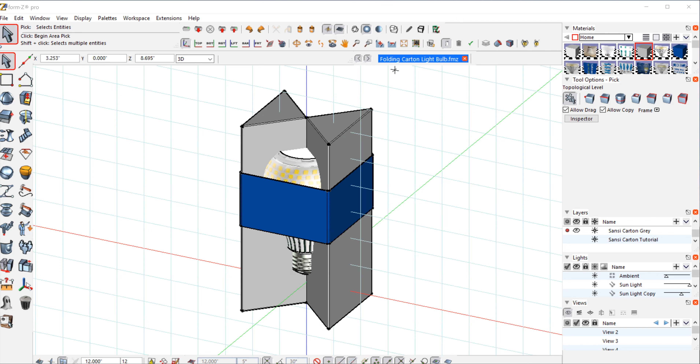So now we have the light bulb built. I'm going to show how to create this folding carton to contain the product. It's based on these two triangular shapes. It's pretty straightforward, and it protects the bulb.

There's no additional plastic or vacuum forming. The bulb is inside and it's protected. I have this outer cardboard sleeve which contains everything, so you can touch the bulb and see it almost in its entirety, front and back. It provides protection and has a relatively high-end look to it.

This particular design, I'm going to show the graphics so it can be positioned on shelf vertically and horizontally, which is quite often done in the light bulb area. They have different orientations—one side will be for vertical and the other side will be for horizontal, which is also an interesting feature of this design.

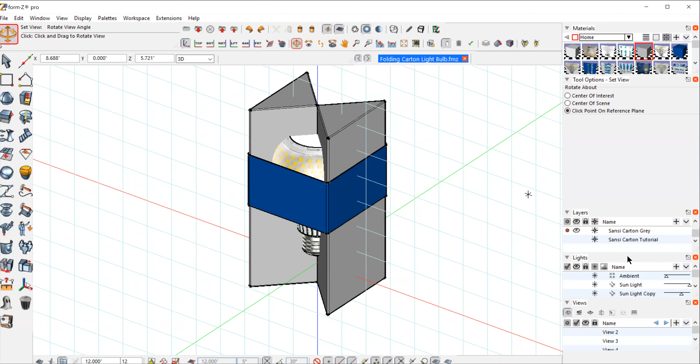So to start with this design, I have the layer set up here. I have the bulb—it doesn't have the texture map on it, we don't need the visual at this point, just the piece of geometry. Then I've created, looking from the top, this square section here. I'm going to go into wireframe.

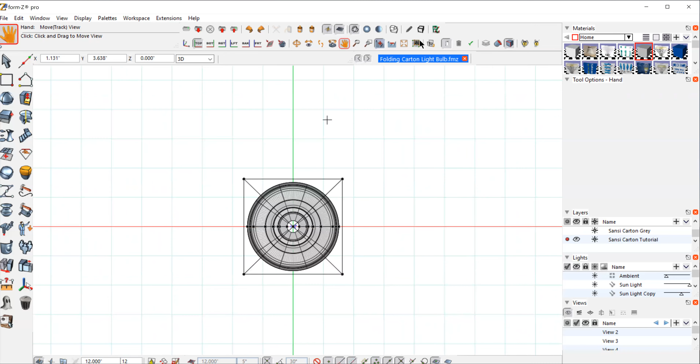Let's just move that in. So this is the geometry—it's got the perfect circle for the light bulb, and I have this square footprint. I have a little extra space in there just to keep it away from the edge for a little additional protection. That was sort of an arbitrary decision.

Then I drew my diagonals, and I'm going to use that as a guide to create these triangles. So I'm going to go to my line tool and start creating these triangular sections, which are actually going to be the glue flaps at the end of the structure. You'll see all this when I put it together.

So I'm going to snap right into center, have my snaps on, and I'm right on center. I'm checking my coordinates—X, Y, and Z up at the top left—and they're all at 0, so that means everything is perfectly lined up. I'm going to use my continuous line tool and just create these shapes while in this view, coming right back to center, double click, and I know that's going to be a surface. That's one of the triangles we're going to need.

We're also going to need another one, which is going to be half this triangle. So I'm going to click on the center and snap into the middle of this panel right here, snapping right to the center, then come over to this corner and back into center, so I have that triangle ready to go.

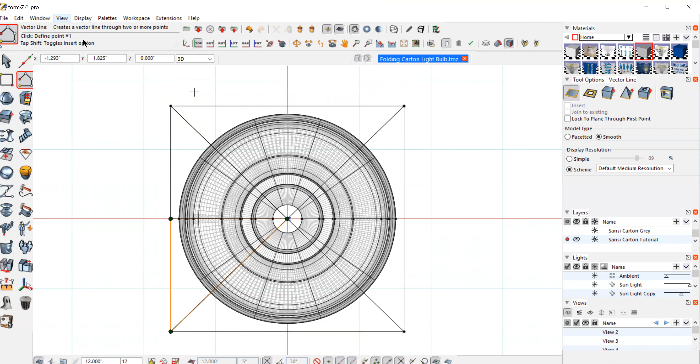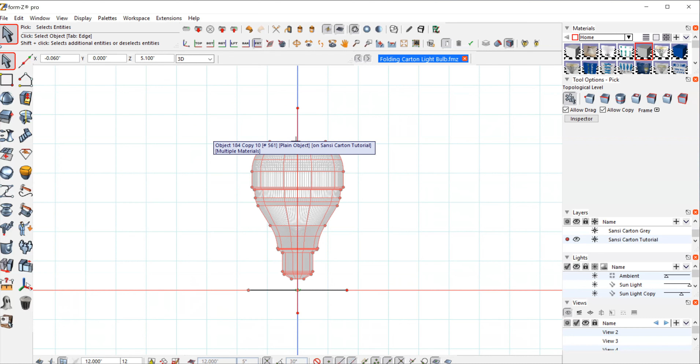So I picked an arbitrary number. I'm a little bit over an inch on the bottom of the bulb and approximately that same distance at the top—I believe I made those exactly the same. That distance is going to be where my glue flap is. I wanted that to be relatively substantial, so I'm just picking that arbitrarily. And that gives me a total package height of 1, 2, 3, 4, 5, 6, 7—so it's about 7 inches total height.

So I went to retail and took a look, and that'll work—that'll be an acceptable height for this light bulb. This particular light bulb is relatively expensive, so it can afford to have a more complex package structure. This bulb retails for anywhere like $30 to $60, $70 or something like that, so it's quite expensive—so we can spend some energy creating a package for this.

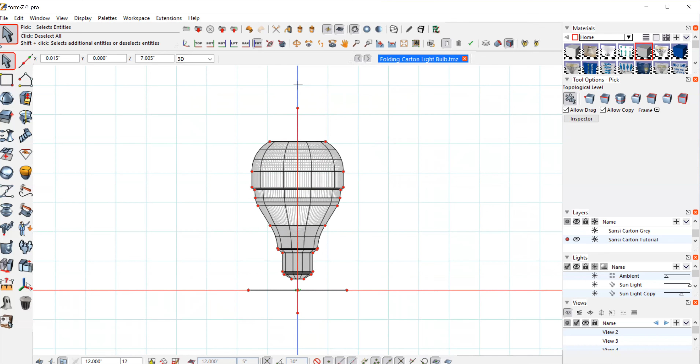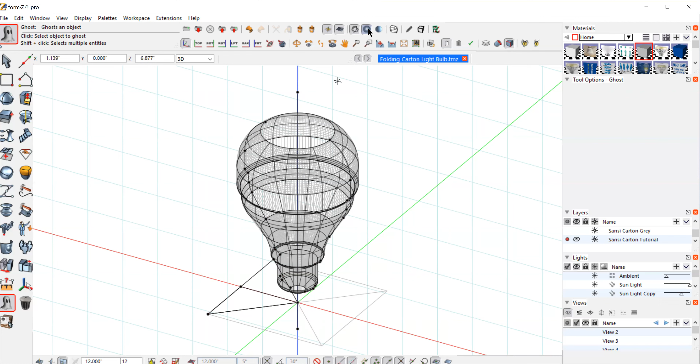So I have that center line, and that will be my guide for my panels to figure out how big everything's going to be. Since I have those triangles set up, I'm going to ghost my guidelines—I'm going to keep them here, but I don't need the rest of these guidelines anymore. I do need the center. I'm just going to go interactive shader, and those are those triangles I just created—there are 2 of them over there, and I will show you how those are going to work.

I do need to create the vertical panel. So I'm going to select under topological level, select segment, and select that segment right there. And I'm going to move 1 copy all the way down to the bottom, right to here.

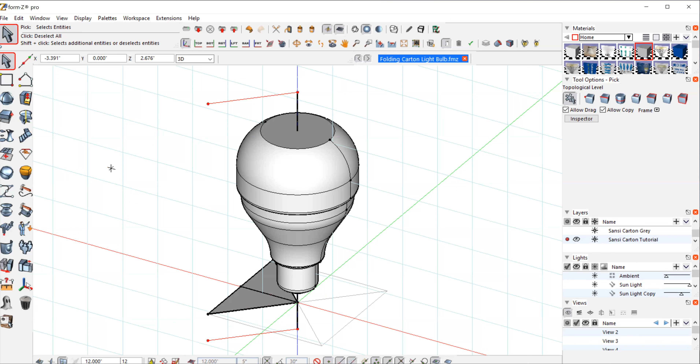Now I'm going to select it as an object, since it's no longer being removed from another piece of geometry. I can select that line as an object, and move a copy of it up to the top. Now I have these two segments. I'm going to shift-select both of them and loft that to create this vertical panel that I need.

So there's my panel. This is where I'm going to use my light bulb geometry to trim this panel with the cutout of that bulb shape. That's why when I made the bulb, I needed to make it accurate—I have that profile because I'm going to use it to create this die line for this package.

I'll go under my trim split tools. This allows us to cut things with lines from other objects, and we can split things by separating the two objects—there's a whole series of different operations we can do here. So we have trim and split. I'm going to use split, down here at the bottom: split first object.

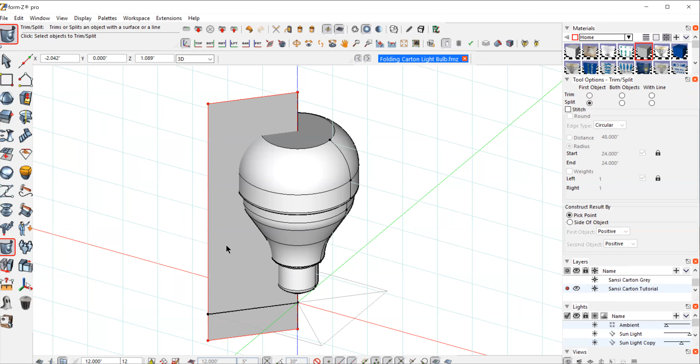That first object will be this panel. I'm going to select the panel, and then select the bulb, which is going to trim from that panel. So it has cut that into these two pieces. I don't need this center profile, so I'll select that and just delete it.

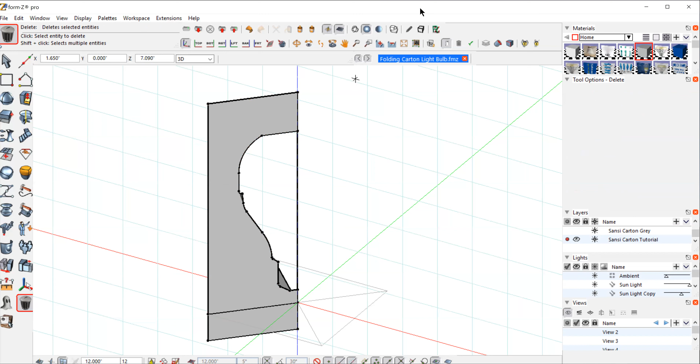Those little shadow areas are not really part of the geometry. Let's take a look at this wire—that's just that under there. So we have a nice clean result. I'm going to select it so we can take a look at this part here. So there it is.

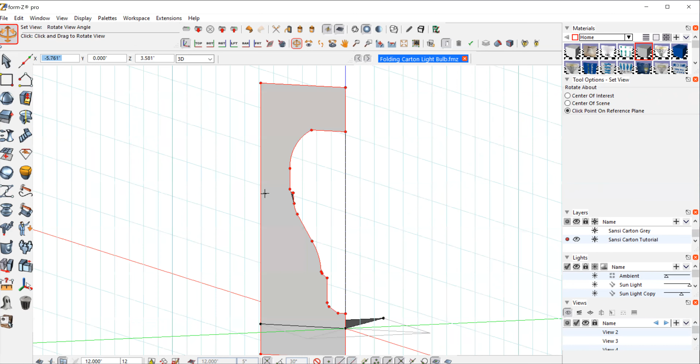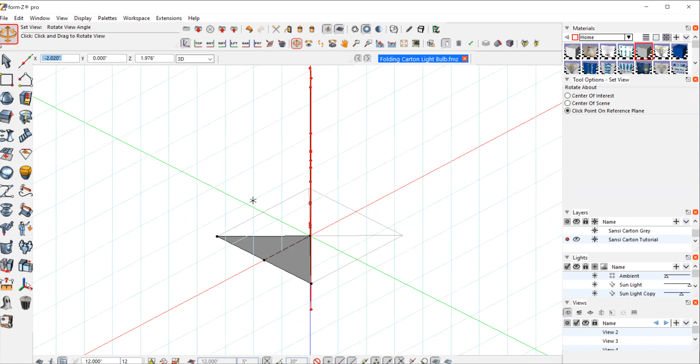So that's the panel right there that I need. In this particular die line, we're going to have 4 of those to create this geometry. So essentially I almost have everything I need to create this die line. We do have this other large panel on the side here, but we can derive that from putting these other pieces together—I'll show that.

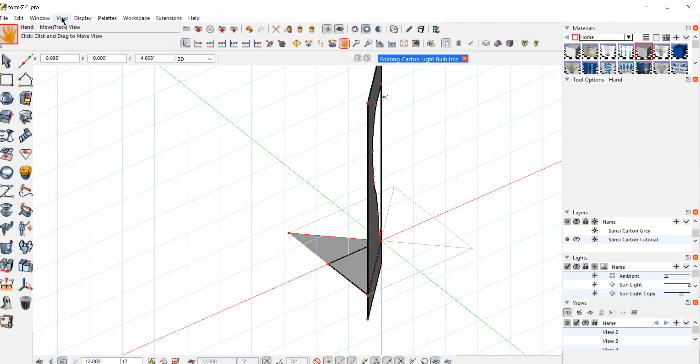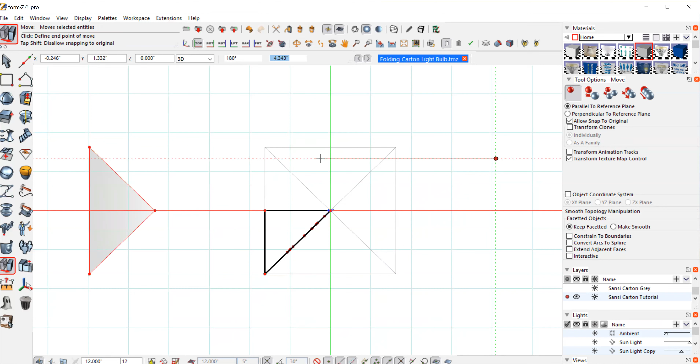All right, let's move these around. I'll do it from the top view—let's do this from the top. I'm going to move these apart so we can see what we have. So I have that piece, that triangle there, and then I have this triangle here. Those will be my glue flaps at the end, and this is my center panel here.

So that's really all I need. I'm going to take these—what I would normally do is move a copy of them and bring them to another layer. I like to hang on to all the different layers, so I have multiple layers here. I've got several packages I worked on in this one folder.

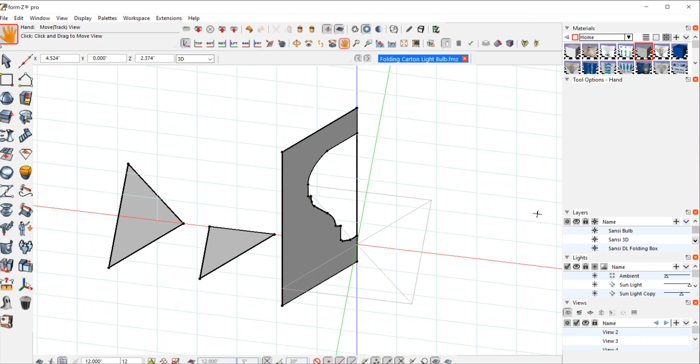So let's just find the die line. I think I passed it—hold on, Sansi, folding carton, here we go. I'm going to take those and bring them over to another layer, which looks like this. So let's remove the layer I was working in, and you'll recognize the parts.

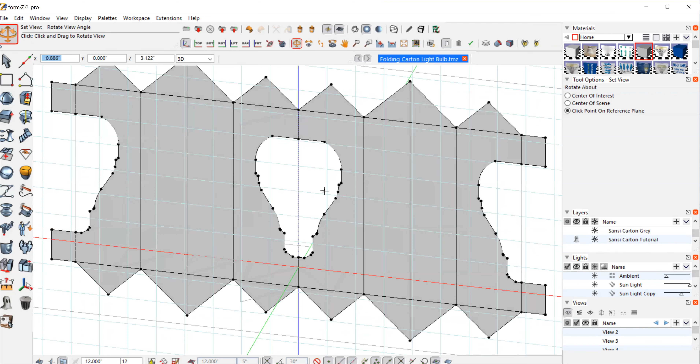So this is how this carton lays out. I'm starting right here in the center. I took 2 of those panels that I created and put the small triangles, which are glue flaps, at the top. These other 2 opaque panels with the large triangle will be the side panel of that box. By taking all of these and laying them out, this is the die line we're going to use to create our sample for this particular structure.

If it's a little confusing here, when we actually cut this out of the cardboard, you'll see how all these pieces fit together. We're going to make 2 triangular sections, one on each side, and it's going to hinge in the center. That's how the whole package is going to be assembled—it's going to be quite interesting how that works.

All right, so in the next tutorial, I will print this out and actually cut this out of the cardboard, and we'll see how this assembly works.